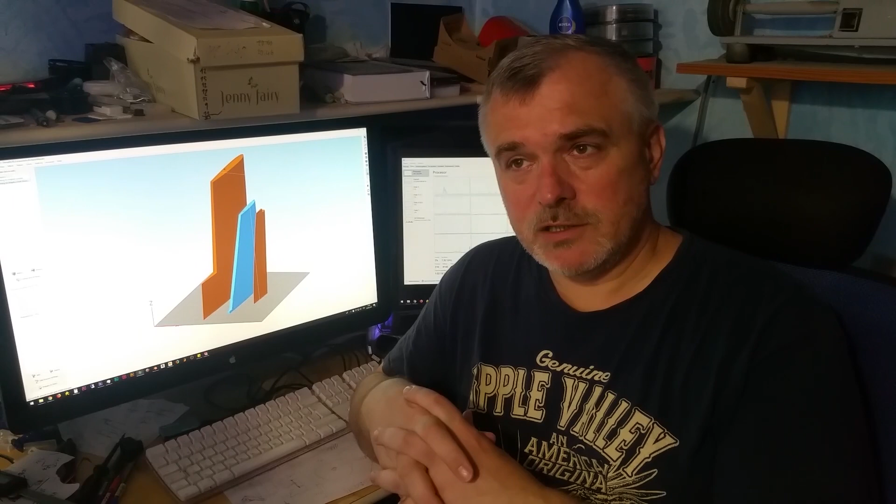Hi, this will be a short series of video tutorials about the slicer Simplify3D. First point, sorry for my English. I know this is far from perfect English, but this is not a language video tutorial, this is a technical video tutorial about the slicer. So take it or leave it.

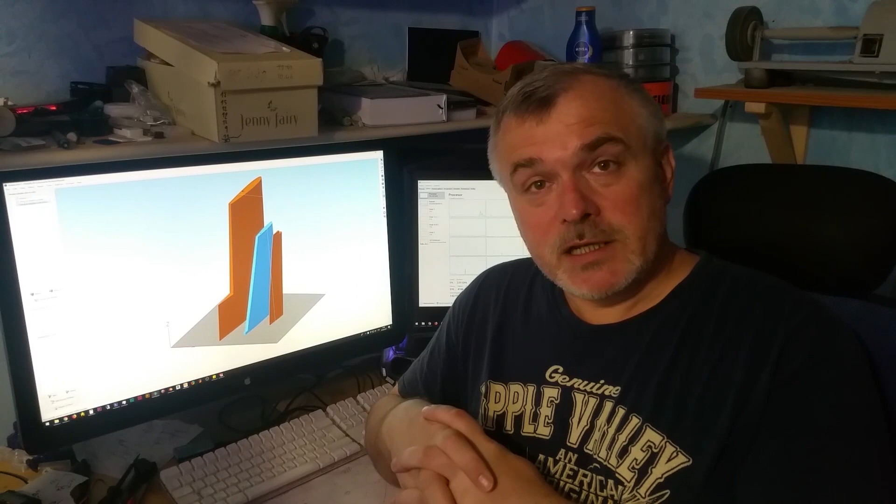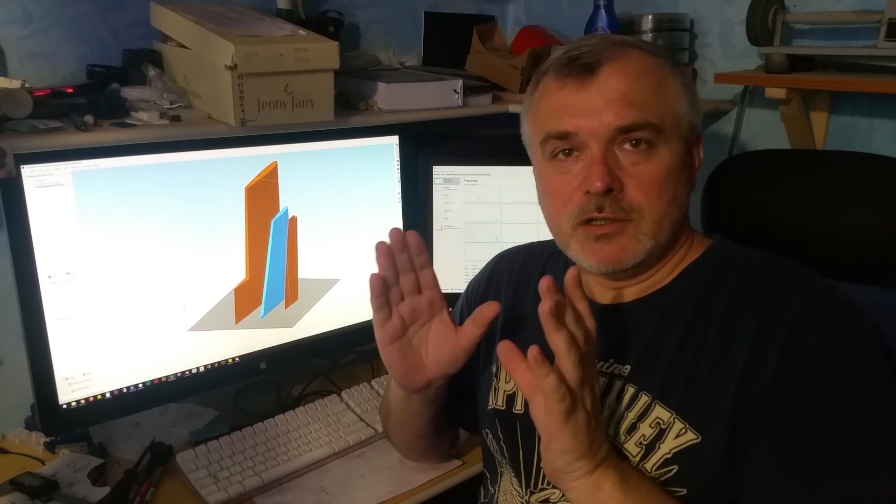I will make a series of short video tutorials about Simplify3D, because I use this software daily for a few years. I know it, I think, really in details. So I want to make short video tutorials about really usable things. Maybe we will meet some options, functions, and I will tell you, sorry, I don't know what it is about, because in 3 years or 5 years I never used that. So yes, this is possible. This will be really based on true experiences with this software.

I will make it in short, I don't know, 20-30 minute parts. One part about user interface, second part about retractions, next part about temperatures, next part about, I don't know, bridging, etc. And a few parts about some smart things and features, how you can make in Simplify3D just smart things, with combination of different functions, etc. So I hope it will be usable for you.

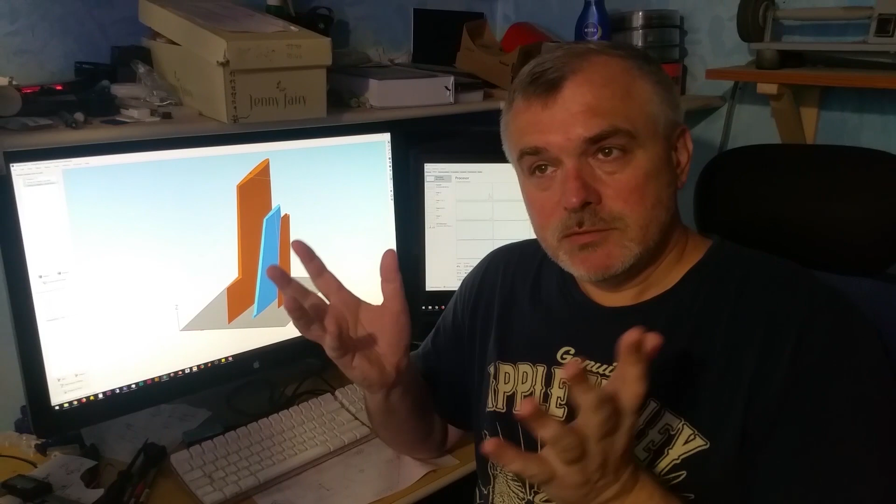So the first part will be about user interface. First part will be about where you can buy the software, pros and cons about the software, comparison with some free slicers, and let's go. So Simplify3D is not free, and this is not very cheap. It is almost 150 bucks, but this price is for installations on 2 computers. So maybe you can buy it with your friend, and each of you will pay only half of this price. So yes, $150, but this is for installation on 2 computers. For buying this slicer, you must create an account and buy it, then download this application and install it. I think this is clear.

But before that, do you need Simplify3D or not? Of course, there are many free slicers. For example, old and really nice Slic3r, or the really nice slicer by Prusa. This is a slicer based on Slic3r, but Prusa added to this slicer more functions with really detailed and nice options. I use it from time to time. KISSlicer, Cura. Cura is a very popular slicer with really nice functions, for example ironing in the last versions.

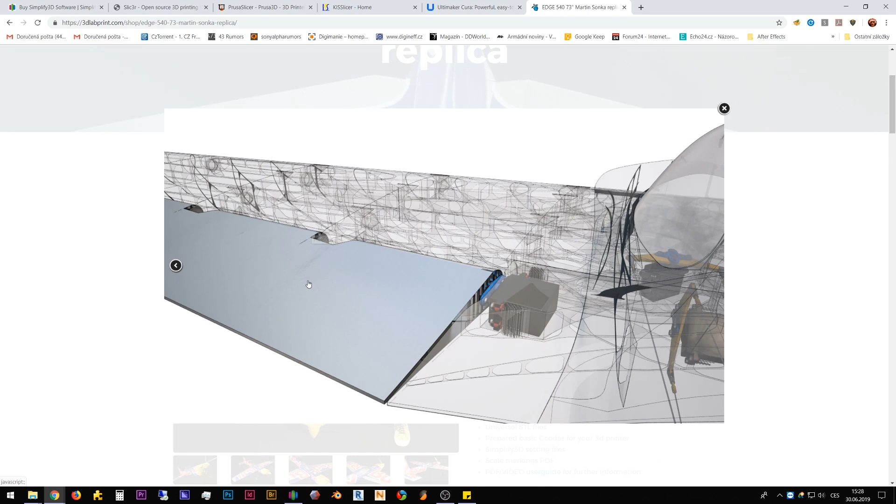And an important thing, maybe you don't know about it, but you may be interested in printed RC airplanes by the Czech company 3D Lab Print, 3DLabPrint.com. This company sells data for 3D printed flying airplanes, huge airplanes, small airplanes, all printed on home 3D printers. I have many of these airplanes, and they fly really well. And all these airplanes are sliced in Simplify3D, because slicing this airplane is not easy. In some slicers it is really hell, but in Simplify3D it is easy. Easy maybe.

And if you buy some airplane, the downloaded files are Simplify3D factory files, a composition of 3D models and settings, tweaked and tuned for this special purpose, because it must be strong and light. This is almost all 1 perimeter print. This just works really nicely in Simplify3D. So if you want to print and fly these airplanes, Simplify3D is for you, just a must have.

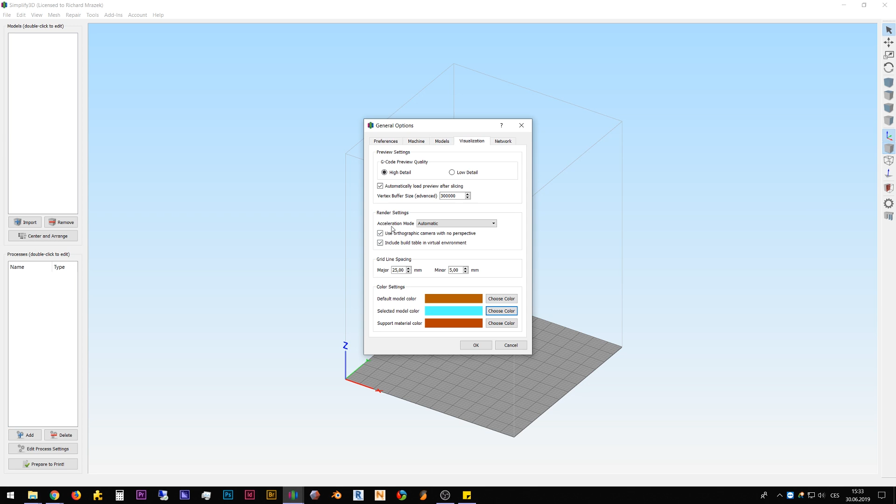Next, probably your color for selected models will be red. I think this is too small a difference between the two colors, so I think a better choice is a color like cyan, for clear recognition of which object is selected and which is not. So: millimeters per second, use orthographic camera, and check your colors.

Okay, here is our build volume, or print volume, of our 3D printer. The size of this volume is based on our 3D printer. When we select the 3D printer you have, Simplify3D creates a profile for it, and this is the true build volume based on the print profile settings X, Y, Z. If our object is inside this build volume, we are sure that our object is inside the print volume of our 3D printer.

If I want to change the view, I just click with the left mouse button and try it. The roller button zooms in and out, and the right mouse button moves your view. You can also use these buttons on the side of your window: default perspective, top view (we'll use this often), front view, and side view.

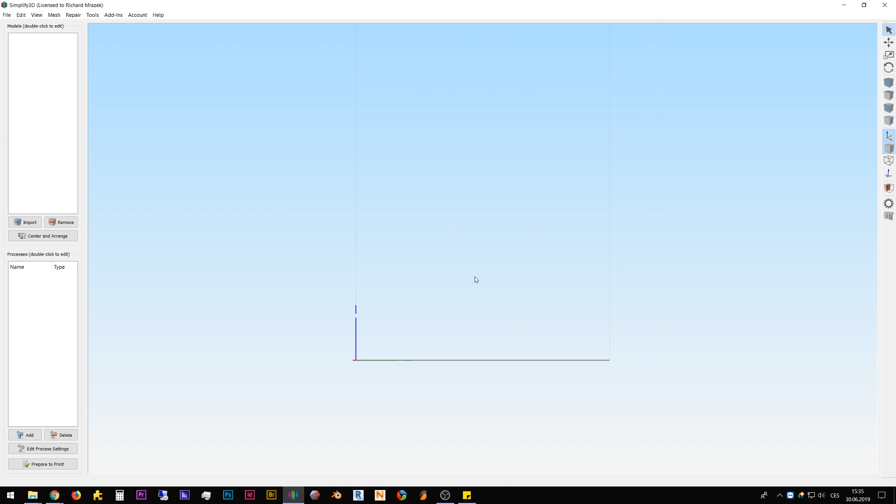Now we will import an object to print into Simplify3D. Objects for printing will appear here. Just press Import, and import an STL file from somewhere on your hard drive. You can import STL, OBJ, and 3MF files, but the most common format is STL, stereolithography. So I will import, for example, this screw.

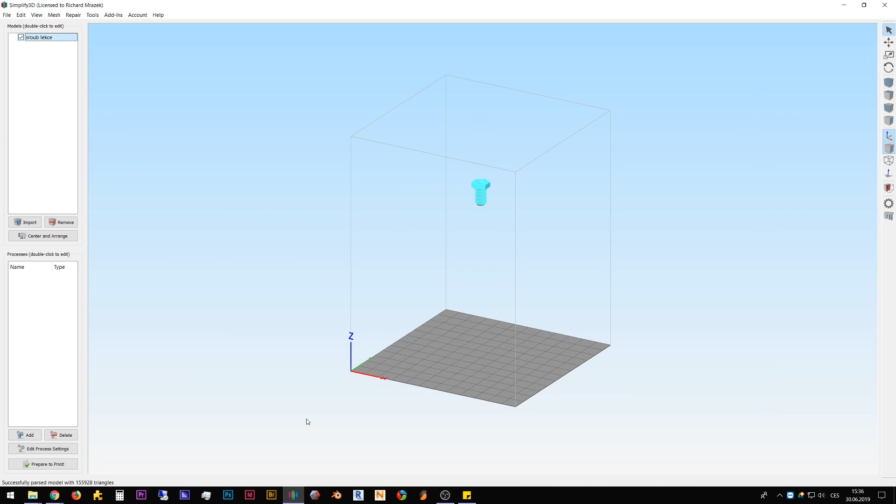Here is our object. If I unselect this object, I will see this color. If I click on it, I will see the color change -- that means the object is selected.

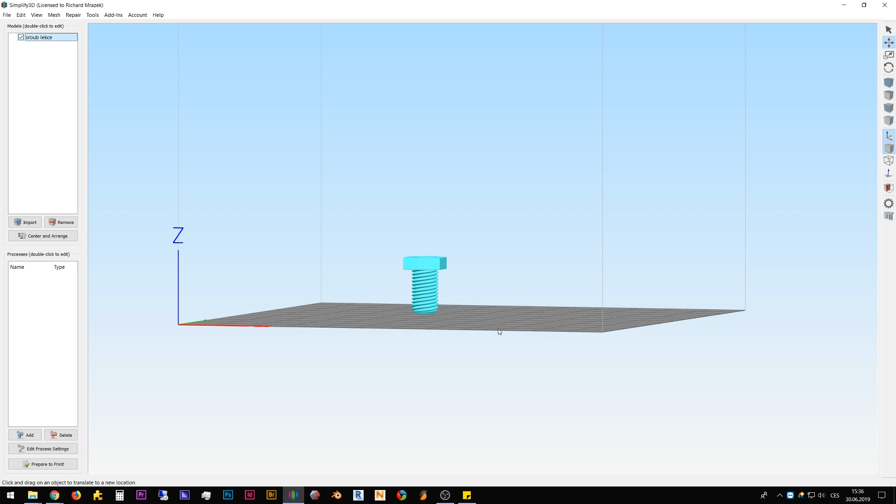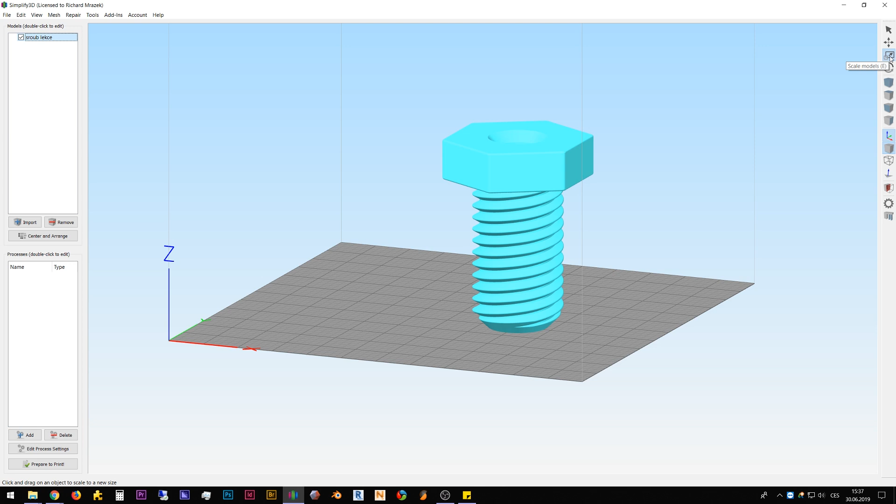I can move this object with this tool, but if I move it this way, it's still moved on the table at zero height -- the object stays on the table. I can also scale this object, but this tool is actually a wrong choice, because you can scale without any numeric control, you don't know if it's 200% or 300%. Don't use that; I'll show you later how to scale objects properly.

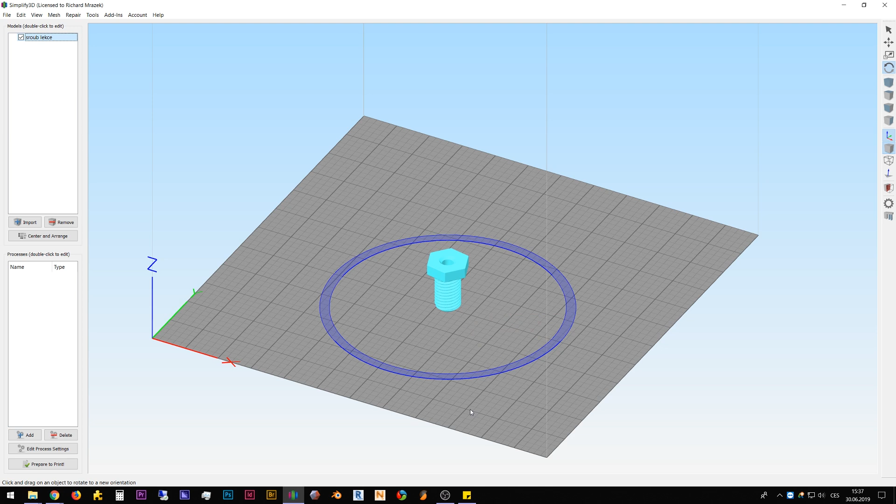You can rotate your objects, but again, it's much quicker to use hotkeys: W for move, R for rotate. Again: W move, R rotate. Escape, then select an object by clicking, then W for move. If you double-click on an object, you will see a window with detailed information and setup for the selected object, since I could have more objects.

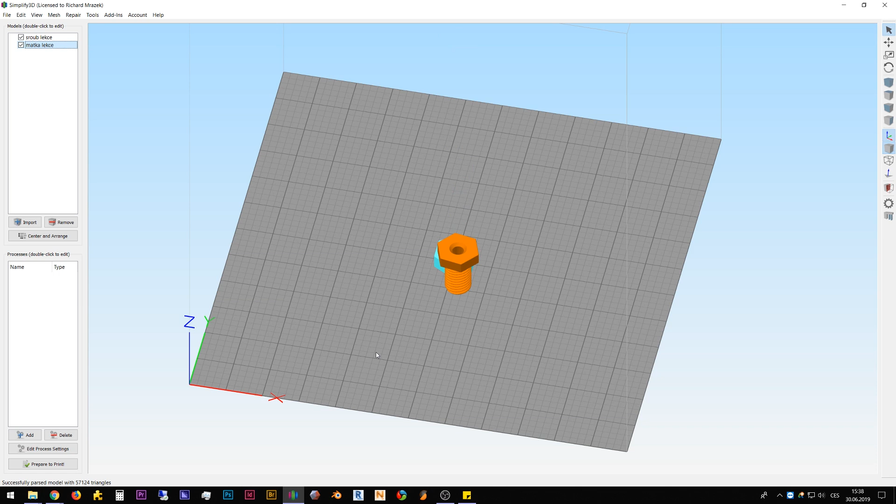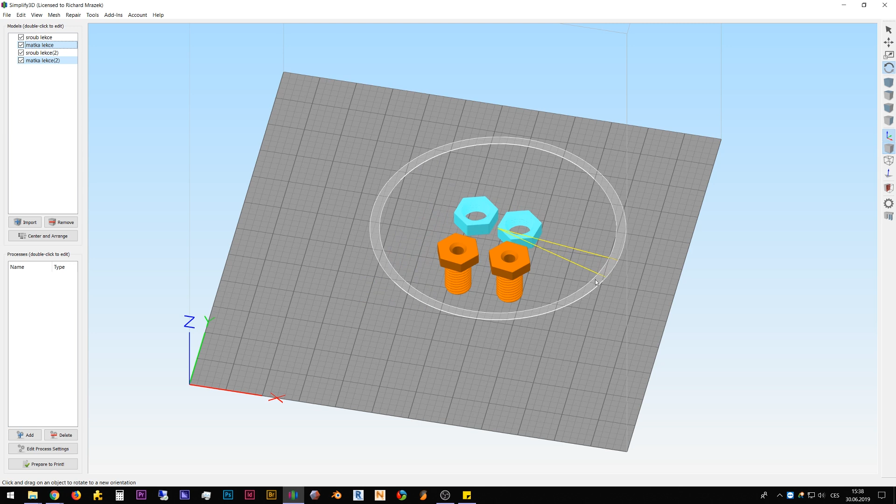I can import a different object, press W, or I can copy and paste an object with Control+C, Control+V, or select Copy Selection / Paste Selection from the menu, then W to move and R to rotate. Or I can use the Center and Arrange button to automatically set objects in the center of our print bed.

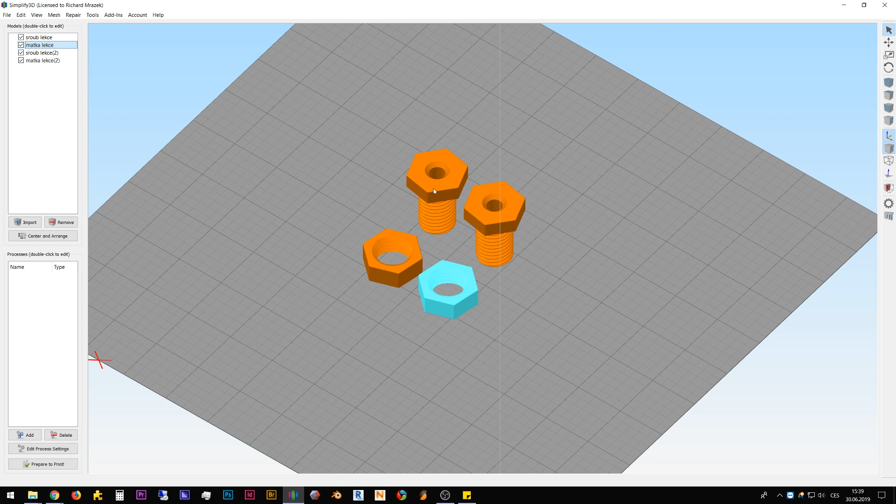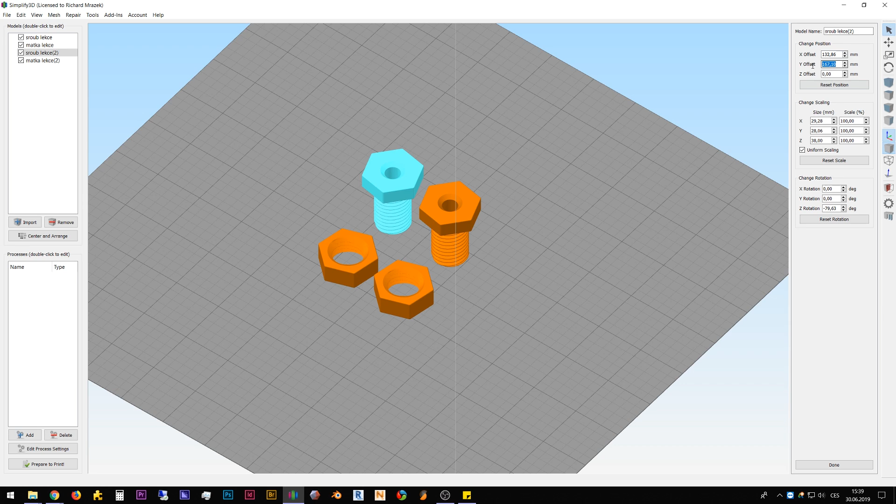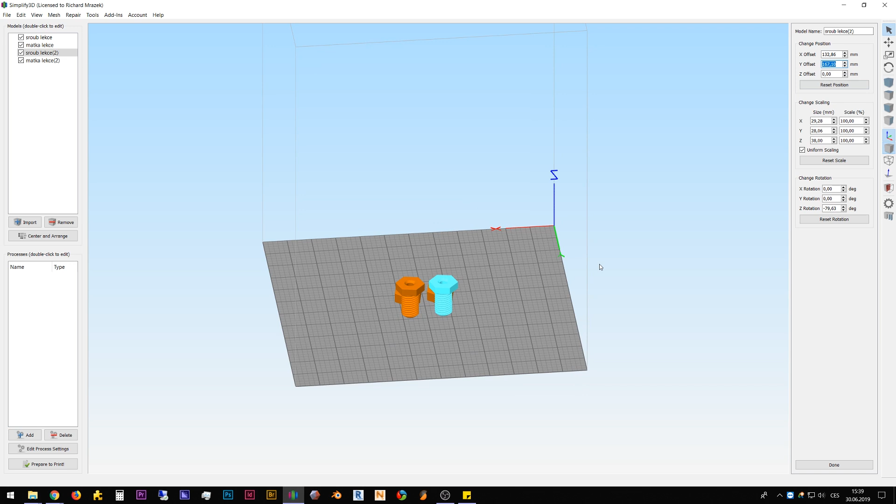If I double-click on an object, I can see detailed options for the selected object or objects. Here I have position in millimeters, measured against zero. On almost all 3D printers, zero is at the left bottom corner nearest to you, but on my Felix printer the hotbed orientation is different, zero is at the top right. Still, on almost all printers it's like the standard. So here I have the coordinates of the selected object.

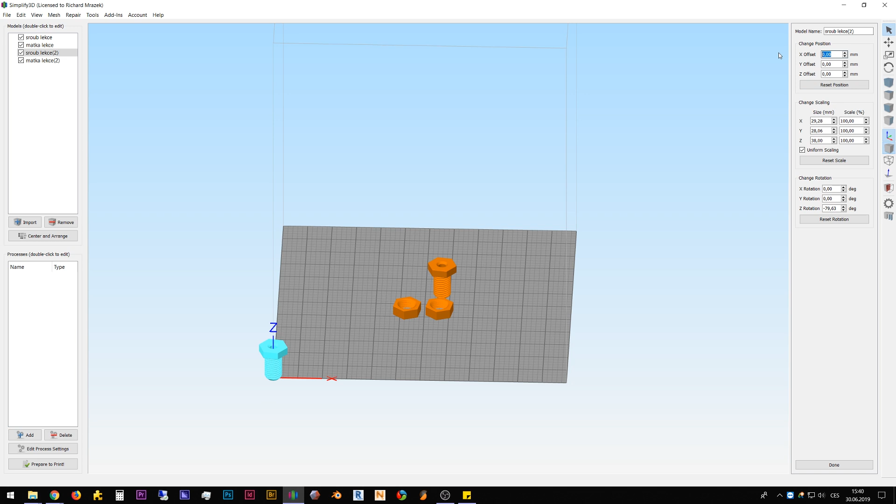I can reset the position, and you will see zeros, or I can change the position of the object numerically.

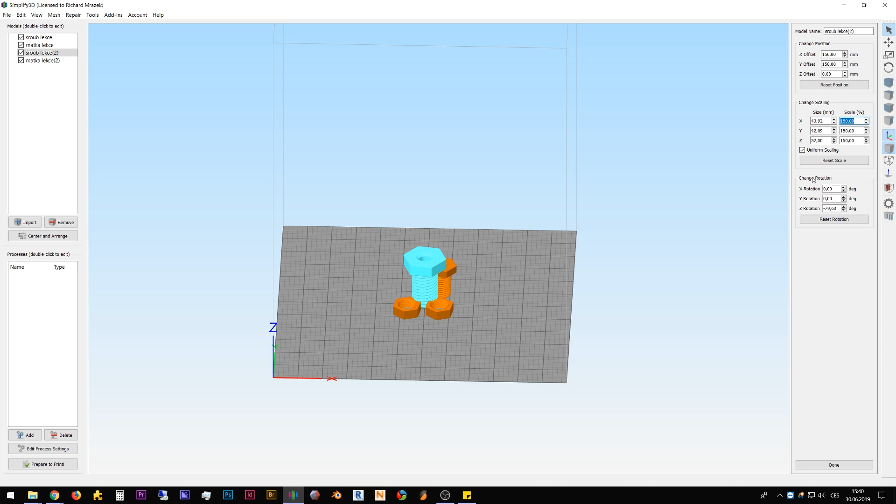I have here options for scaling. This tool is mostly for visual use, but here I can change scale with exact numbers. Double click, and I can change scaling uniformly or non-uniformly. I can just deform my object.

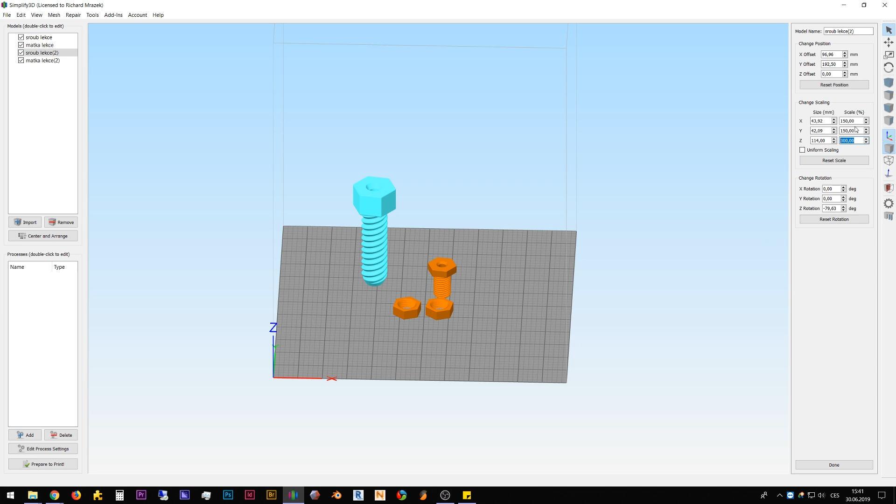I have exact control by numbers, and again I can reset scale to default numbers. Here I can change rotation, or rotate. I can rotate the model object by numbers.

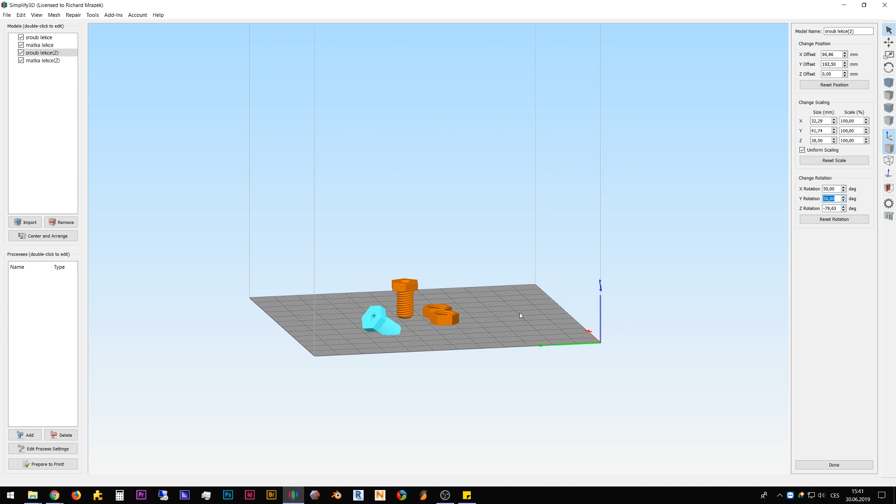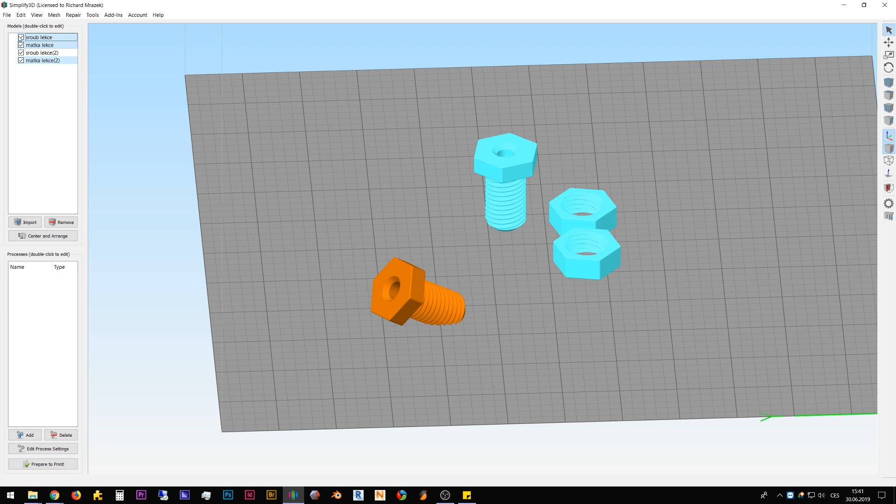Okay, done. Of course, this is wrong, this object is wrong. Now I want to operate only with this object, and I don't want to see these other objects. I can just uncheck these objects in this window, and I don't see them anymore. They are still here, I just hide them.

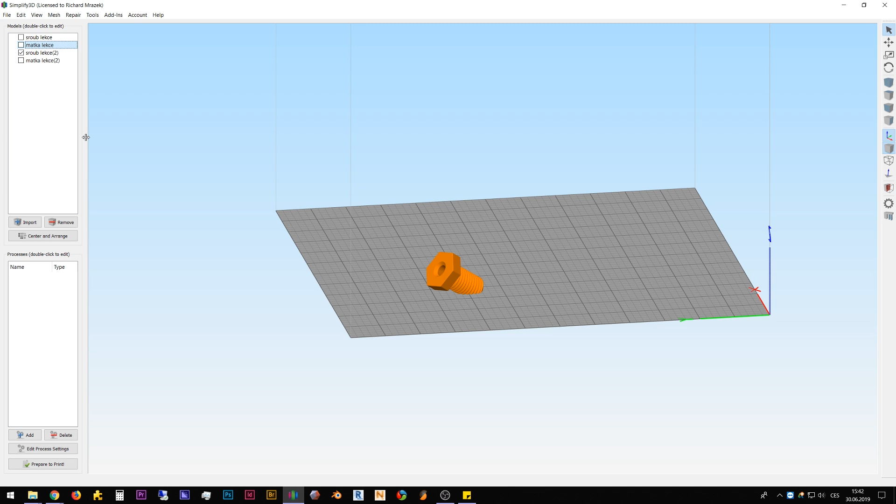So what is this object? Oh, this is wrong. Okay, put it on the table. You can use it from the menu, drop model to table, but I must select it again. Drop model to table - you must have selected this object.

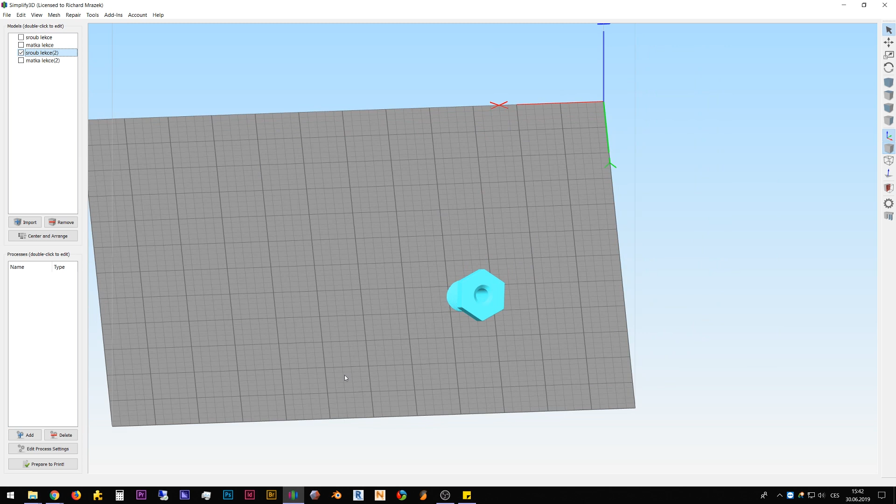Okay, Control 3, Control 4. Now I have this object on the table, but this is not quite right. Dropping model on table, you can use this function from the menu, or Control plus T. T as in table.

But again, this is unusable. I want this object, this surface, on the table. Again, you can use this function from the menu: place surface on bed.

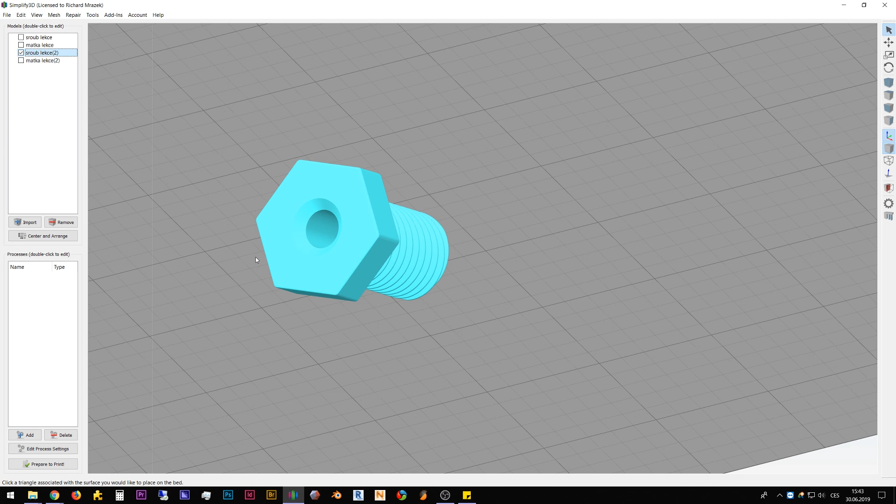Now I am going with the mouse over the object, and Simplify3D shows me the polygon surfaces. So this surface I want on the bed. Oops! Wow, that's nice, right?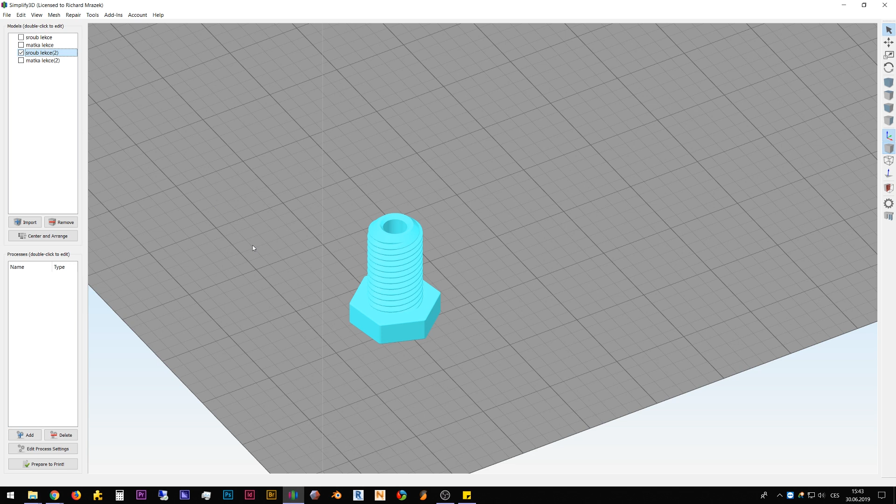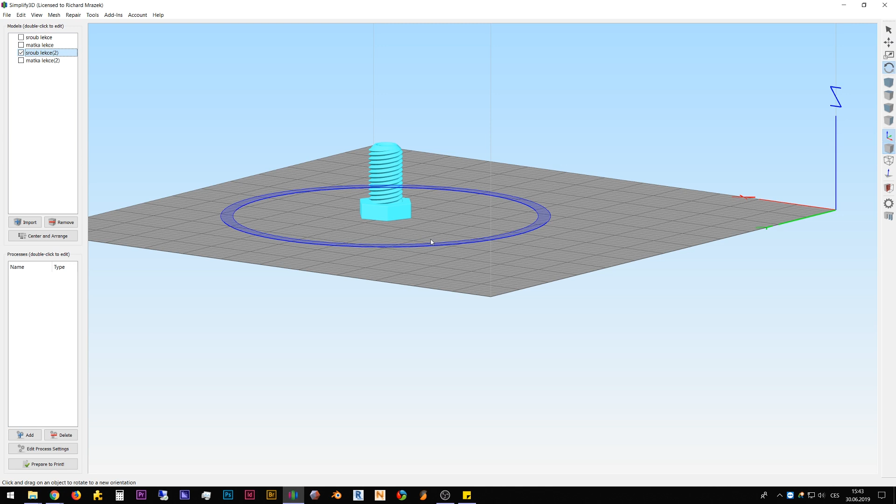Or I can use the same function with the hotkey Ctrl plus L. So now I'm pressing Ctrl plus L, and I will select the surface which I want on the bed. Ctrl plus L, Ctrl plus L, Ctrl plus L, and W, and R, and W. Yes, this is about basic manipulation with objects.

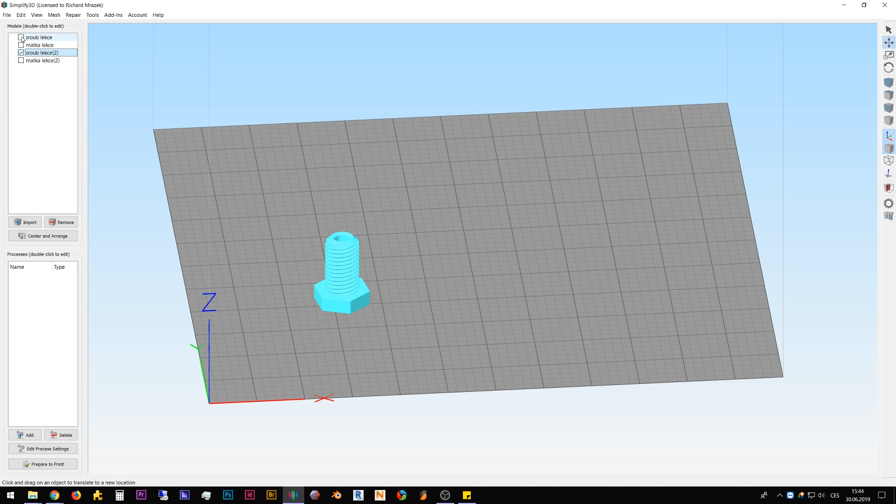Again, hotkeys are really much better for quick work. Okay, I will make this next object visible, and now unselect with escape, or unselect by clicking beside objects in this window.

Now I want to create some print process, because if I want to generate G-code for 3D print, I must generate this G-code by some print process. Print processes are here - I can use one print process, or I can use more than one.

I can use one print process for all 4 objects, or I can use one print process for 2 objects, and a second print process for the other 2 objects, for example with different infill, different perimeter, different wall thickness, or different extrusion ratio.

Or I can use 2 processes for one object. One process will print this part, for example, the bottom part, and the second process will print the upper part of this object.

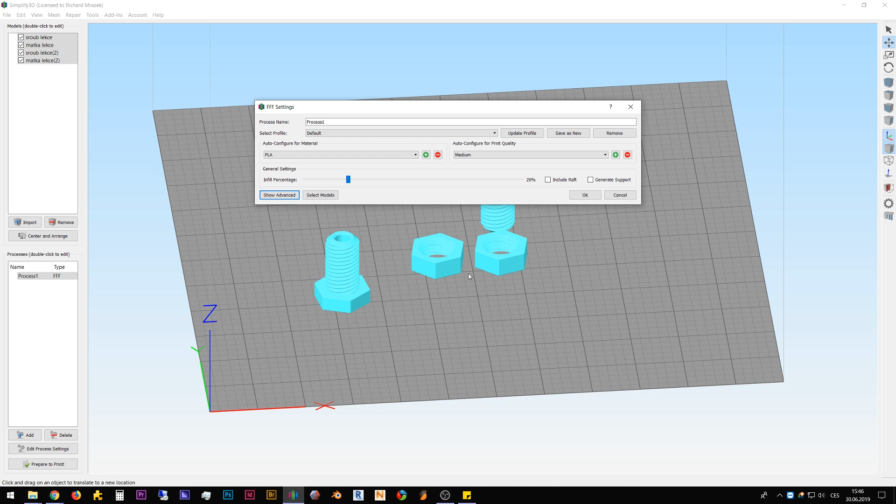Now I will add some print process. Probably, if you see this window for the first time, it will look like this. This is really not for experienced 3D printers. Yes, we will just use this window with advanced functions.

Here we can see many options, and almost all of them I will explain in next videos. But now I will explain only basic things about the print process.

Each print process has a name, and each print process uses a print profile. Process name, I will set here for example 01 - it's just not an important thing. Process name is only for our orientation in this project. And if I save this file, I will save this process name only for this process.

I can't use the process name of this process in other jobs. This is just really not important, just the name of the process, nothing more.

What is really more important is the profile. Here I have many profiles for a few of my 3D printers, and probably you will see here only a default, only one profile, depending on your 3D printer which you select during the first run of this application, during the start of this application.

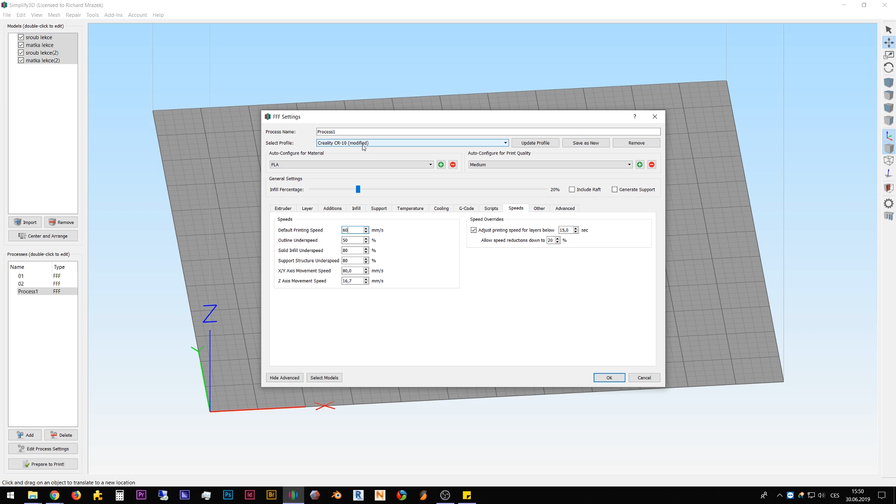Okay, and I will create the next print profile, for example with the next process with name 03. I will select default, default CR10 again, and I will change something different than in the previous case, for example speed. And again, this profile is modified. So, name 03. Now I have here 3 print processes.

One is with default Creality CR10 print profile. Next is modified Creality CR10 print profile - we changed extrusion multiplier. And in print process number 3, again Creality CR10 modified print profile - we changed speed. So this name is the same as here - it tells us only that this profile is somewhere modified.

This modification of these print profiles will be saved only for this file. Now I will save this file, for example as S3D vT 1. The extension of Simplify3D files is factory. Here you can see the progress.

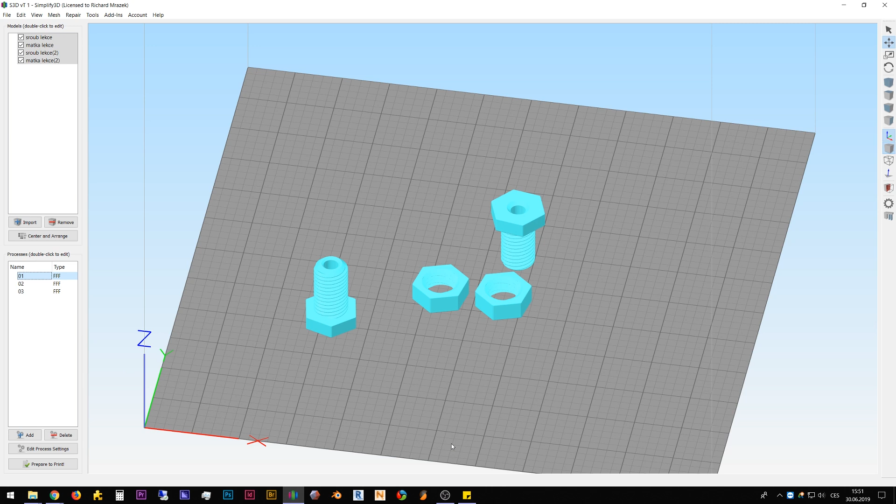So now I have this file saved. What is really nice in Simplify3D is that if I save a file, I save it not only with print processes, but with all objects too. All imported 3D objects are inside this factory file. It means, for example, if I delete these STL files from my hard drive, they are still inside my Simplify3D factory file. This is really important, and some slicers just don't know how to save a file with STL files inside.

But Simplify3D knows that, and does that. Yes, and this is nice.

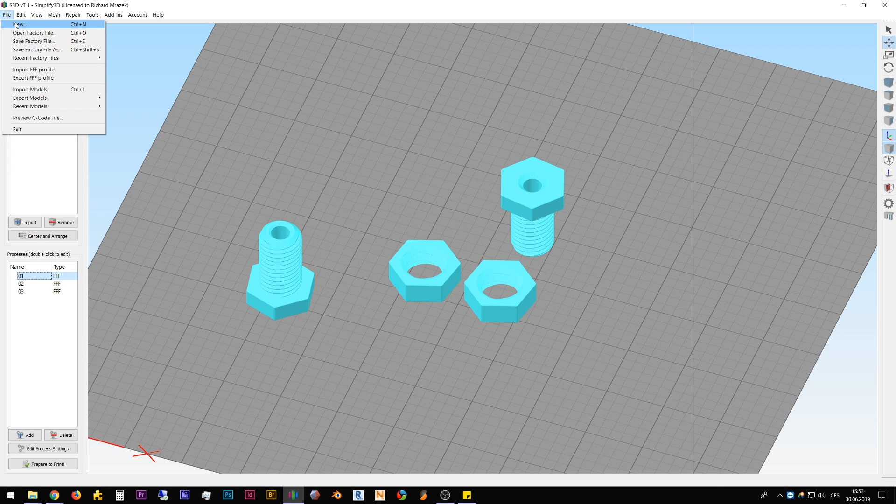Okay, so I have saved this file with these 3 print profiles. Now I will create a new, clean file, and I want to add a new print profile with modification from the previous file, but I can only see the default Creality profile here. I have not saved the profile from the previous job in this profiles list. If I want that, I must save this profile.

So I will go back to the previous file. I can use open factory file, or I can use recent factory files. This is our last job. Yes, this is our previous job, and here I can see our 3 print processes.

Number 1 is just default, but number 2 is default with some modification. If I want to use this profile with this modification in other new files, I must save it as a new profile. I will name it, for example, CR10 mod, as in modification 1.

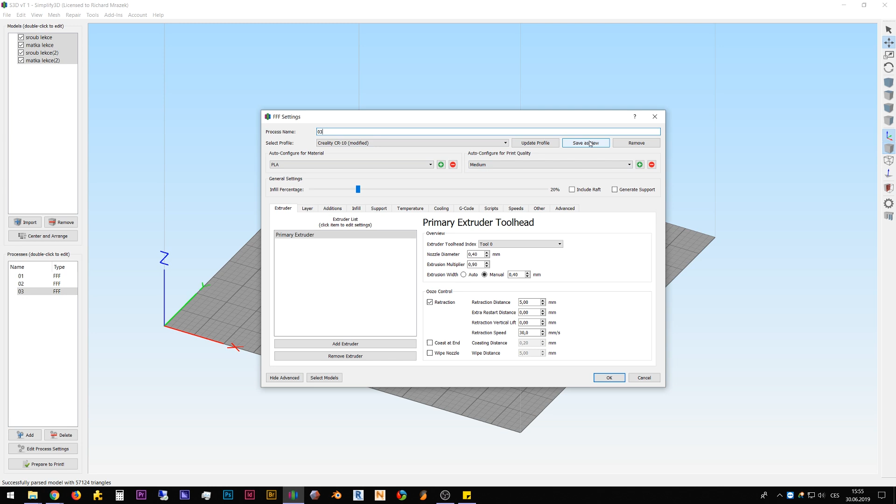Okay, and you can see this profile with the new name. Now this number 3 is again some default CR10 profile with some modification. Again, I will save it as a new profile, CR10 mod 2.

Now you must save this job, for saving these profiles as default profiles in the Simplify3D application. And now if I create a new file with Ctrl+N, and I want to add a new print process, I have here in the list of print profiles not only the default CR10 profile, but also print profiles from the previous job.

It means if I tune or tweak my print settings for some kind of print on my 3D printer, for example for an airplane, I will use this tuned print profile, and I can use it in all new files. Again, for example, with some next modification. This is okay, this is working, but now I have not enough time.

I will make it a little bit quicker and up the speed. And again, I have modified the CR10 mod 1 print profile. Again, this modified print profile will be saved only for this file, only for this job. If I want to use this modified profile in new print files, I must save it again, for example as mod 3.

Yes, and then I can just select from my own custom print modes.

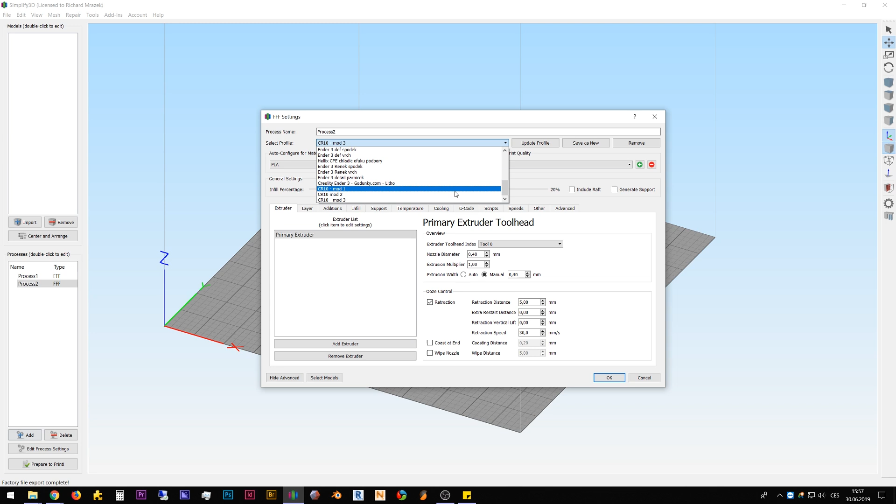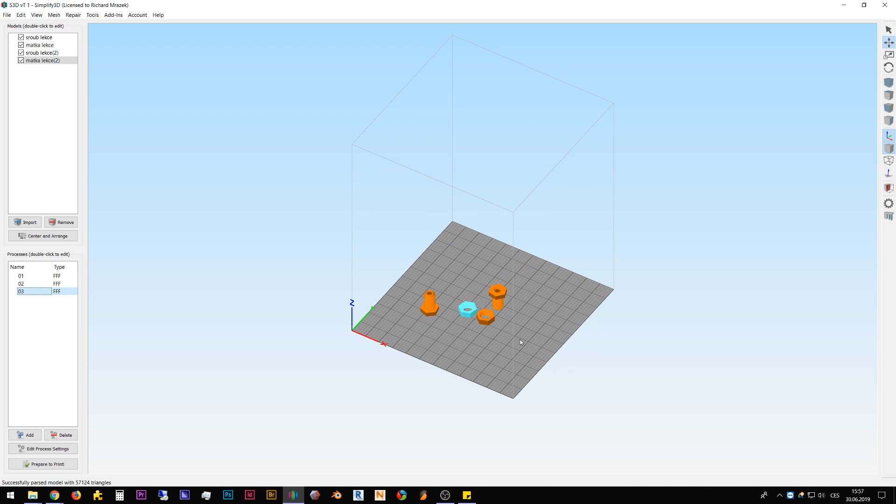Now I will go back to our previous job, previous file, and I will show you a few last things in this video: how you can print each object with a different print process, and where I can set this function. For example, with this print process 1, I want to print only this and this object.

Now if I check or select this print process, Simplify3D will show me which objects will be printed with this print process. Now with this second print process, select models - it means select models which will be printed with this print process number 2. Select none. This object will be printed with just this print process.

And in the last print process, select models, this object. So this print process will print these two objects, this print process will print this object, and this print process will print this object.

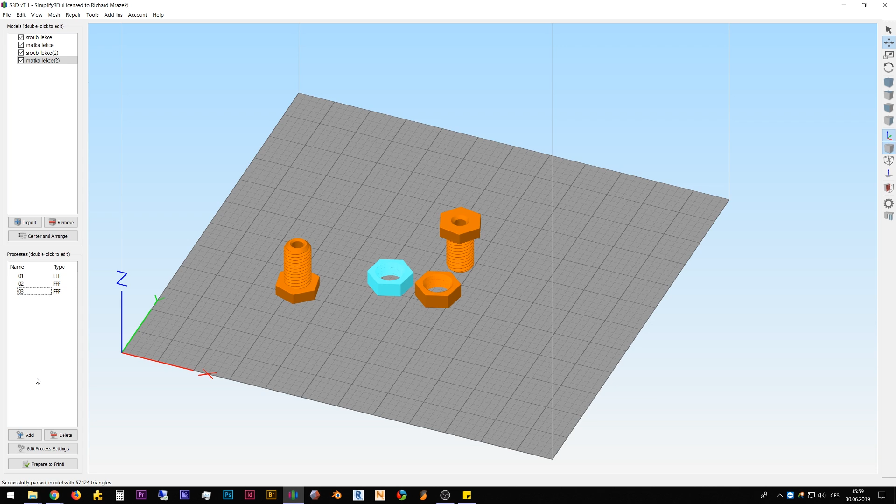If I make a mistake and link some object with two print processes - this print process is fine, it's for two objects, but this print process is for this object and this print process is for this and again for this object - it means this object is linked with two print processes.

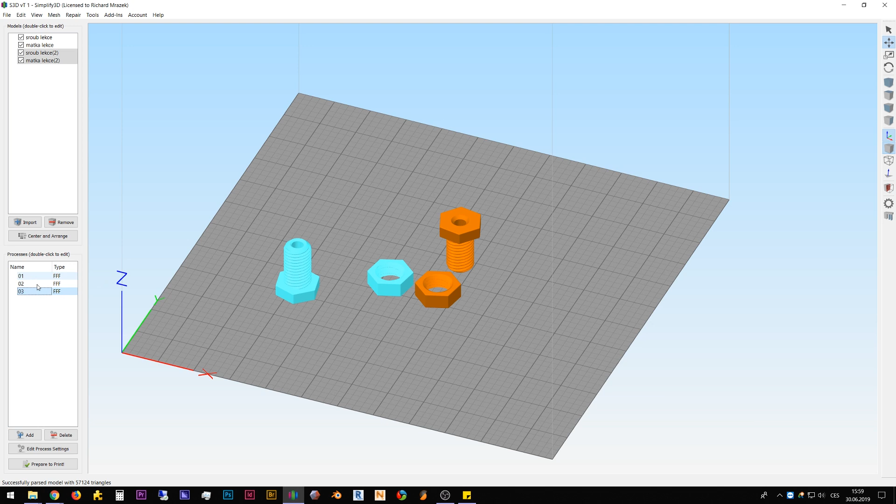And if I want to slice this job, this print, Simplify3D will ask me if it is okay. It will tell me, you have one object with two processes. It will just be printed twice, or two times, on the same spot. Yes, is it okay or not.

In almost all cases this is a mistake, but in some special cases we can use this function in smart ways to print some difficult things. I will show you that later in the next movies.

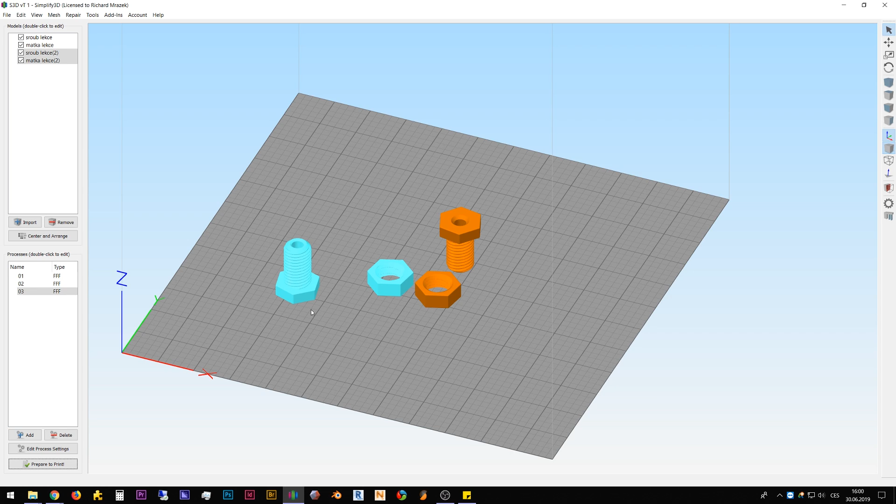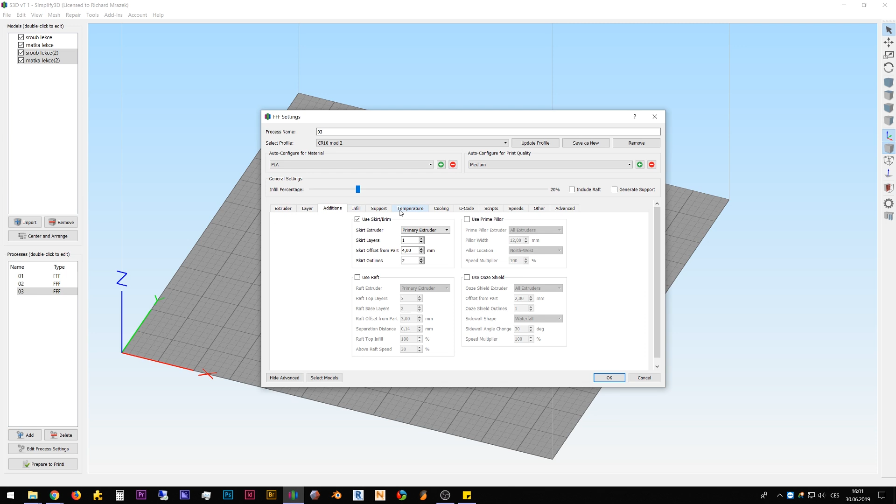This video is done for now, I think. I hope I haven't forgotten anything important for this basic lesson. In the next videos we will take a look at one setup after another, step by step, one video at a time, because this is really important and sometimes really difficult to understand. So again, I will make it in separate videos. So for now, I think that's all. Thank you for watching. Have a nice day and see you later.